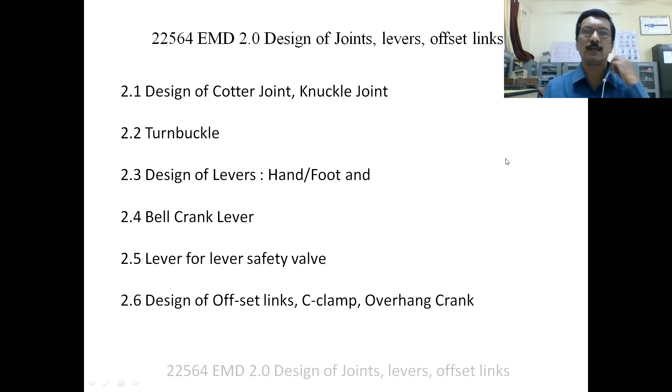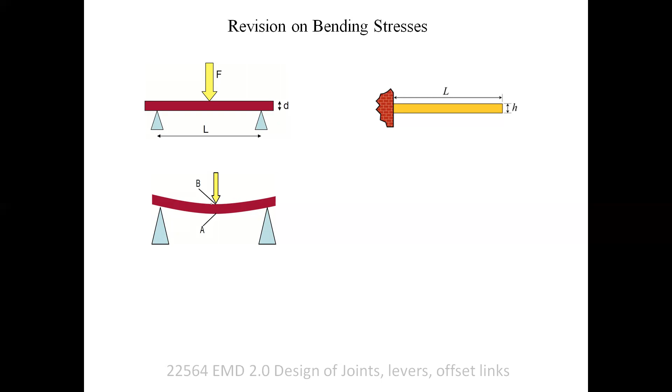Again look at the picture, you will find that the force causes compression at the top surface and tension at the bottom surface, and the particular body gets failed due to compression as well as tension. So there is one line in between this compression and tension, that line indicates the neutral surface, and on that particular neutral surface there is no stress observed.

If you go beyond, or in either side of that neutral axis or neutral surface, above the neutral surface you will find an increase in compression, maximum at the top. Below that particular center line, going downward, it is zero at the neutral surface and maximum at the bottom side. So this is the analysis for a simply supported beam, or when the beam is subjected to bending like this. It may be a single force or more than one force, but the behavior is almost like this.

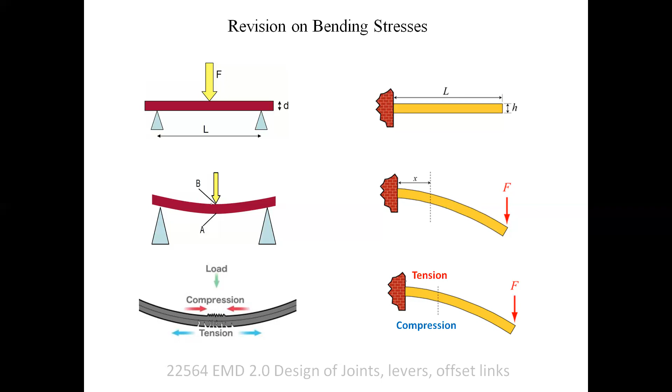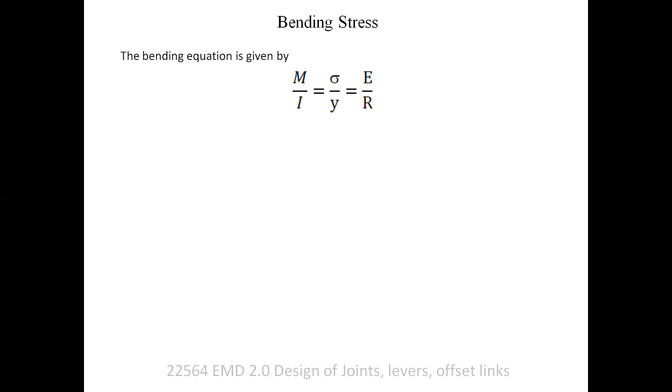Now we know that the bending equation is given by M upon I equal to sigma upon y equal to E by R. We have already studied this in strength of materials. Here, what are these notations? M is the bending moment acting at a given section. Sigma is the bending stress. I is the area moment of inertia of the cross section about the neutral axis. Y is the distance from the neutral axis to the extreme fiber. E is the Young's modulus of the material, and R is the radius of curvature.

Now the bending moment is the multiplication of force into the distance from which that moment is taken. Moment of inertia is the area moment of inertia of that particular cross section on which these stresses are acting. The moment of inertia is taken from the neutral axis - why from the neutral axis? Just now I have explained.

Above the neutral axis, there is a change in stress from zero to maximum, which may be compression in case of a simply supported beam, or tension in case of a cantilever. Below the neutral axis, the stress again changes from zero to maximum, and it is maximum at y distance, which is the distance from the neutral axis to the extreme fiber.

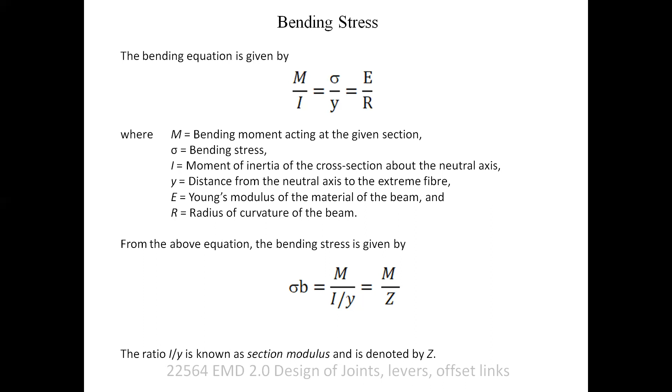For each and every cross section, the moment of inertia is different, the distance y is different, and the section modulus is also different. The section modulus for different cross sections can be found very easily, and you will find different section modulus values depending upon the cross section.

There is a possibility that the particular section may bend through the x-x axis, which is horizontal, or through the y-y axis, which is vertical. Now, how this x-x axis or y-y axis can be fixed depends on how the bending occurs.

Look at this machine member: here is the force, and because of that there is bending like this. If I take the bending like this, it is maximum here and maximum here, while at the center plane it is along the neutral axis. This is the position we consider when we look at the x-axis cross section, so that's why we consider Ixx as the moment of inertia equation.

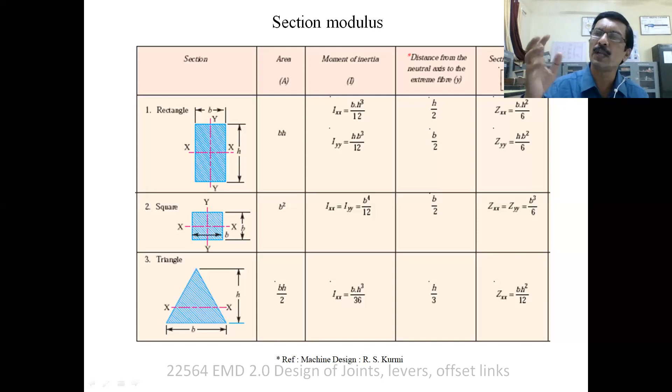When we go into detail about the numerical problems, we'll see this in detail.

Now, for the rectangular area, base into height is the particular area. The value of the moment of inertia is base B into height h cube, divided by 12. It may be Ixx or it may be Iyy.

In case of Iyy, the base is h and height is B. In case of Ixx, base is B and height is h. So depending upon which neutral axis you consider, you have to take the cube of the depth. In Ixx, the depth is h. In case of the y axis, the depth is B, so we consider B cube.

Now the distance from the neutral axis to the extreme fiber: in case of the horizontal x-axis, we consider h by 2. If I consider y as the neutral axis, then b by 2 is the extreme distance from neutral axis to extreme fiber. So if I consider I by y, then along the x axis the section modulus becomes bh square by 6, and along the y axis it is hb square by 6.

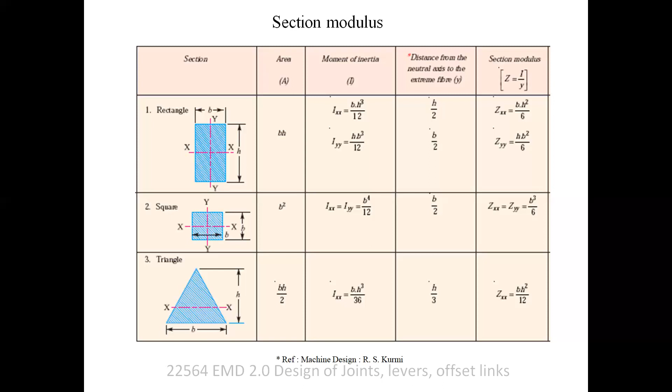Next, if I consider the section modulus of a circular cross section, it is symmetric about XX and YY. Obviously the area will be pi by 4 d square, and Ixx or Iyy is equal to pi d to the power of 4 divided by 64, where d is the diameter of that particular circle. Now if I take I by y, then section modulus Zxx or Zyy will be equal to pi d cube divided by 32.

Similar to that, there is a hollow section. In that hollow section, the section modulus is pi by 32, d to the power of 4 of nominal or major diameter minus d1 to the power of 4, which is the minor diameter, divided by the nominal or major diameter. So that is the section modulus of a hollow circle.

Similarly, we can consider elliptical sections also, but that is a special case. If that particular elliptical section is there, we can consider the section modulus given in our table. So this is all about section modulus. Now again come to our bending.

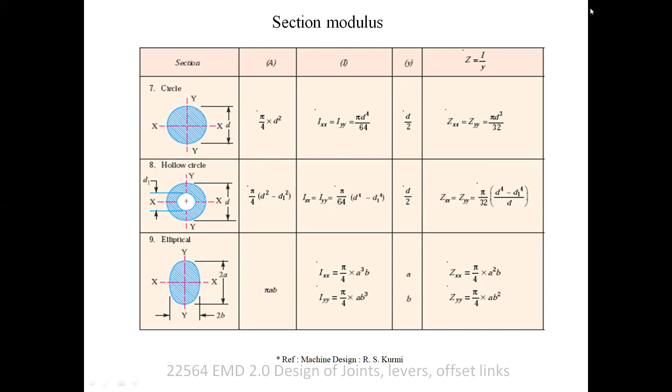Now let us take one simple problem, and based on that simple problem we'll try to solve the bending stress equation, and find the diameter of the axle or whatever is asked in our exam numerical. Let us read and understand the statement of the problem, and after that we'll try to solve this problem of bending.

An axle 1 meter long, supported in bearings at its ends, carries a flywheel weighing 30 kilonewton at the center. So there is an axle which is 1 meter long, supported in bearings, subjected to a flywheel - that is a centrally applied load of 30 kilonewton magnitude. If the bending stress is not to exceed 60 megapascal, find the diameter of the axle. So we have to design the axle such that it can sustain the load of the flywheel.

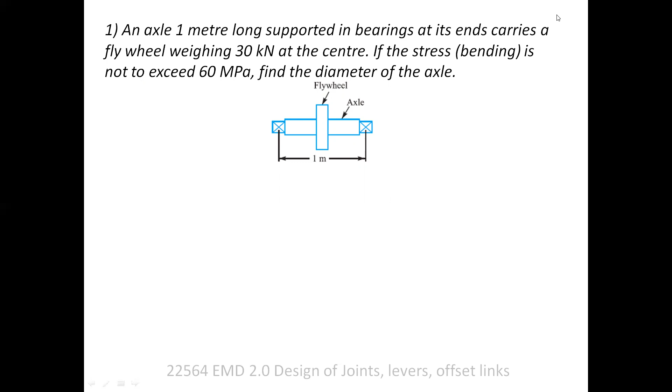Now, as this is the problem of an axle, we have to consider our bending stress equation. First let us see what is given here. The data given: a 1 meter long axle, meaning 1000 mm, so that is the length. Force of 30 kilonewton, which is 30 into 10 power of 3 newtons. The permitted bending stress, which should not exceed, is 60 megapascal.

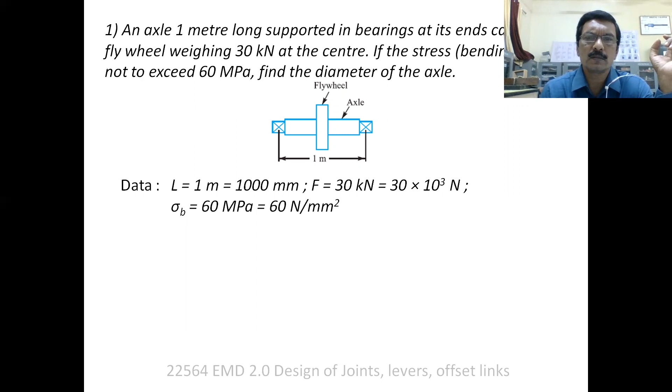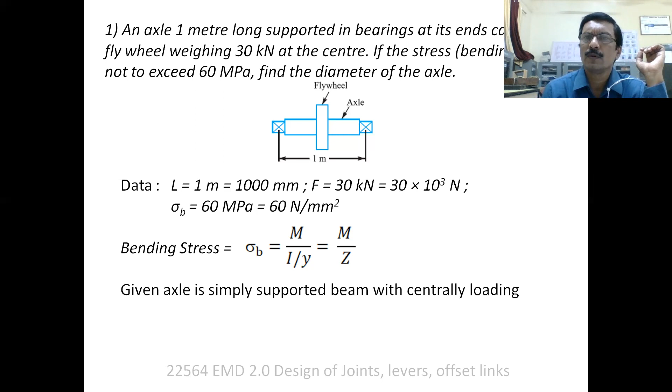Now let us go to our bending stress equation, which we have already discussed: sigma b is equal to M by Z. So M by Z is the bending stress equation. In that, the given axle is simply supported with central loading - this is the condition given. We have to find the moment, the maximum moment on that particular axle, because in M by Z, Z means the axle has a circular diameter, so we can find Z afterwards. But before that, the first thing is to try to find the moment.

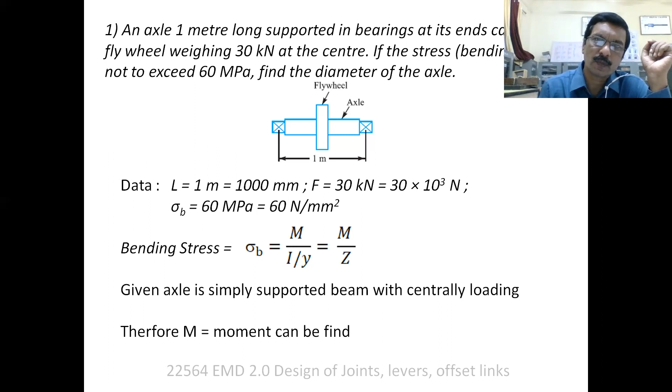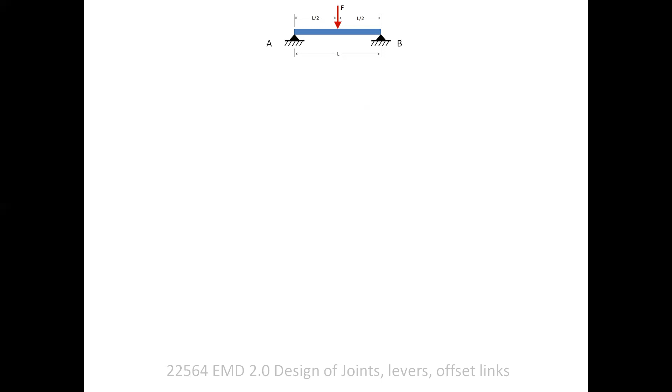Let us first see a simplified diagram of that particular simply supported beam, centrally loaded. So there is support A and B, and there is a central load on that particular beam.

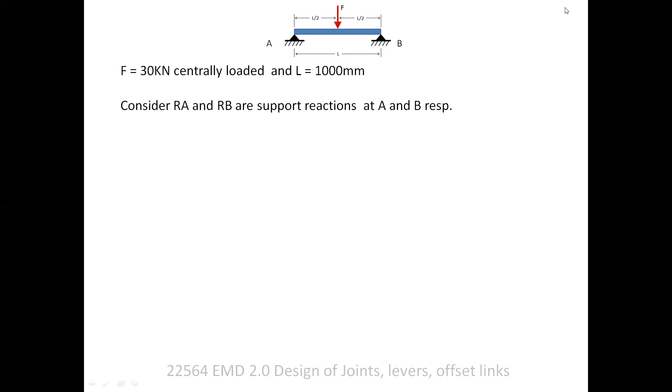Now, because of the force F, there are two reactions at the support. Consider RA as the reaction at A and RB as the reaction at B, both acting vertically upward. The load is acting in a downward direction, so the reactions must be in the upward direction.

How do we find that reaction? The possibility is that the bending moment is maximum at the center, where we expect the failure of that particular beam. When it fails at the center, that means we want the moment at that particular point, and for that we must know the reactions RA and RB.

If I know the reactions or forces at RA and RB, which are reactive forces, for that, generally in our strength of material, we do this procedure: let us take moment about A.

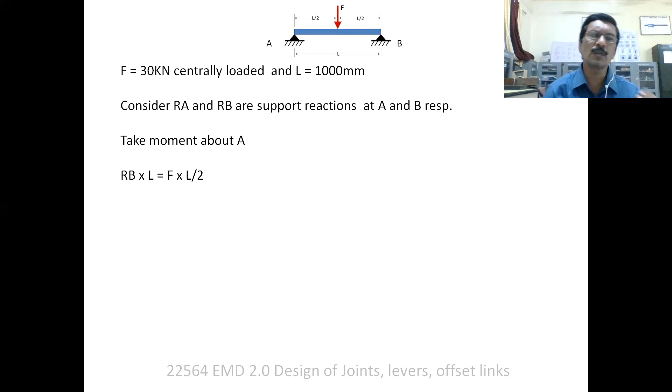When I take moment about A, all moment at A is 0. There is an anti-clockwise moment of reaction RB, which is at L distance from A, so RB into L is one moment. This is equal to the opposite sign moment caused by force F. Force F is at L/2 distance, so RB into L, anti-clockwise moment, equals force multiplied by L/2, clockwise moment. These two moments balance when we take moment about A.

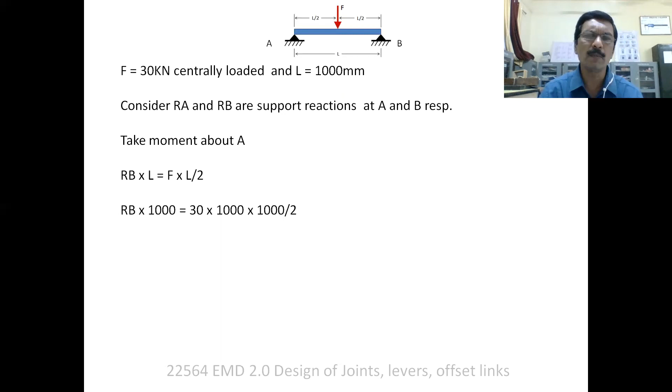Now let us put in all the values so we can get the value of RB. RB into 1000, the length of that particular axle, equals force 30 kilonewton, so 30 into 1000 Newton, multiplied by L/2 which is 1000/2. Because of that, we get RB equal to 15 kilonewton, or 15,000 Newton.

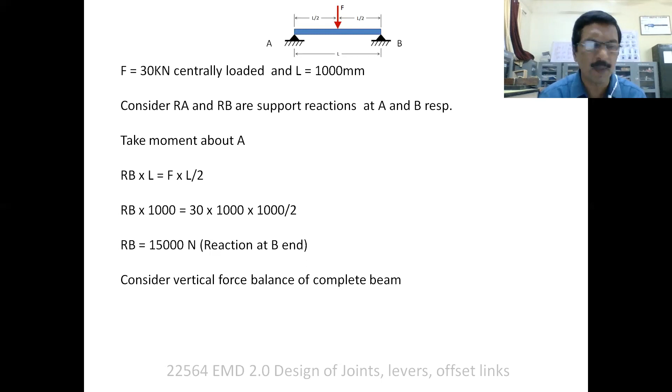Similarly, if I take the complete vertical balance of that particular beam, we find that total vertical force F equals reaction RA plus RB. So force 30,000 equals RA plus 15,000, which gives RA equal to 15,000 Newton or 15 kilonewton. So now we know the reactive forces at A and B.

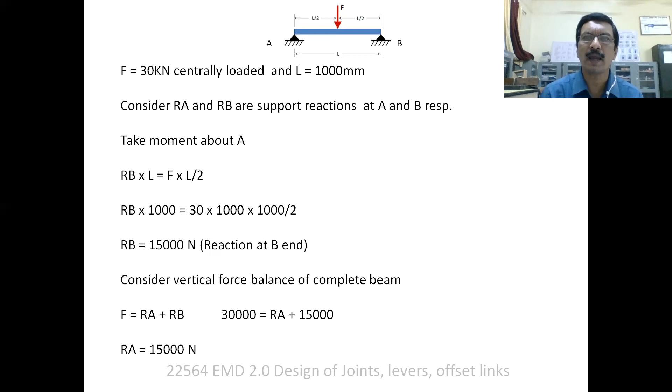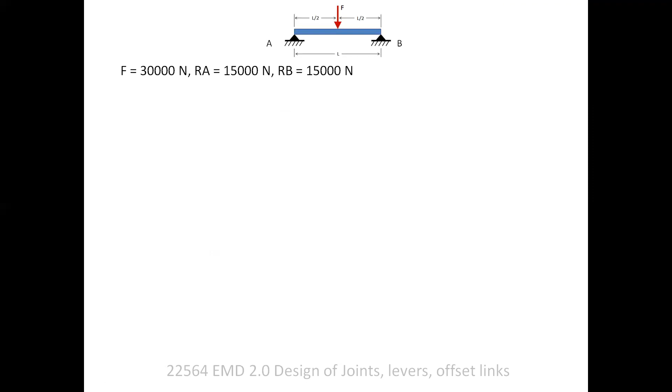Now, considering all the forces in the vertical direction, the maximum moment will be at the center of the beam where the force is acting. Therefore, if I take the moment at the center, that will be the maximum moment. You can take moment from the left side of the center, or from the right side. So to the left we have RA, and to the right we have the RB reaction.

Now the moment at the left side will be RA into L/2 if I take moment at the center, or RB into L/2, which is one and the same. So the final moment M that we find is equal to RA, which is 15 kilonewton or 15,000 Newton, into L/2 distance which is 500 mm. That comes out to 7,500,000 Newton-mm as the moment.

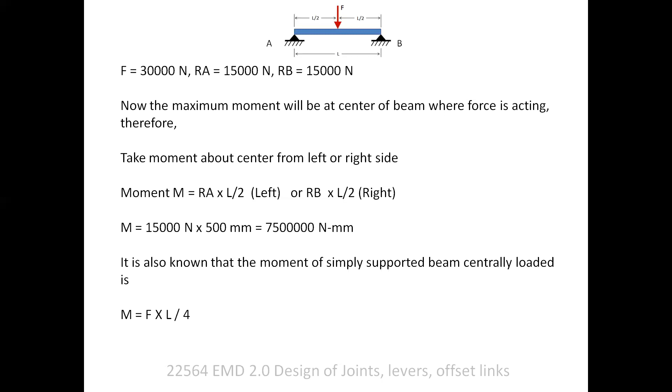This moment is the maximum moment, and in strength of materials we have a simple relationship for a simply supported beam with central loading. As you might have studied, the maximum moment for a simply supported beam is equal to FL/4. So FL/4 is also equal to the same value we already found. It is one and the same - this is the moment M for the simply supported beam.

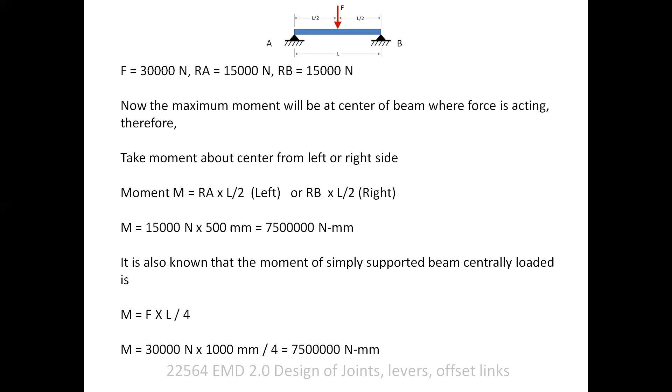Now if I take this particular moment along with our bending stress equation, we can find the diameter of the axle. So let us go further. Bending stress is equal to M by Z, and we already know the moment we just found.

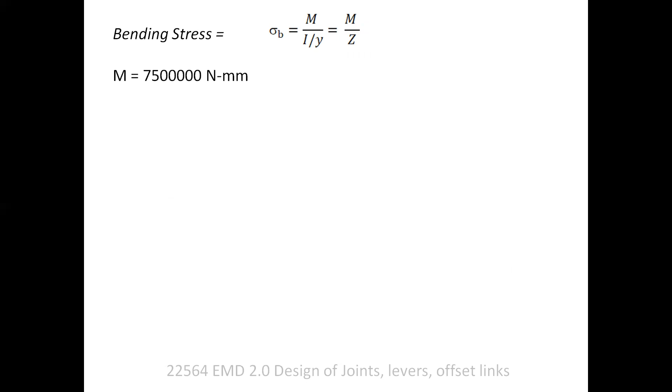Now let us go for the section modulus for the circular beam. For a circular beam, the section modulus equals pi d cubed divided by 32. This is already mentioned in that table that we use to find Z. In that particular section modulus formula, we have our diameter - that is the main output we're looking for, the diameter of the axle.

So we'll put all the values into the bending stress equation. We know there is a stress of 60 Newton per mm square given, 7,500,000 Newton-mm is the particular bending moment, and pi d cubed by 32 is the section modulus. By mistake a zero was left out in the moment - you make it correct, it is 7,500,000, that means there are 5 zeros after 75.

So from this equation, we can find the diameter, which comes out to exactly 108.3 mm. Now we must round off.